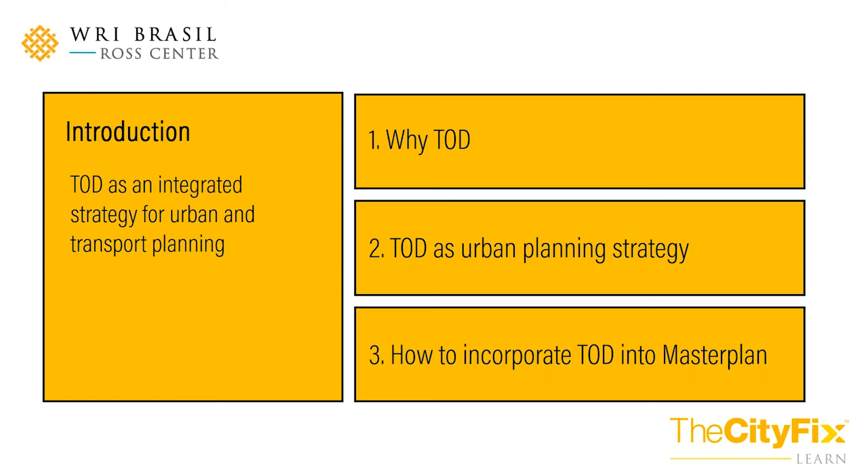As Luisa just said, we will talk about how to incorporate TOD in master plans, and almost the entire content of the presentation that we will have today is presented in a publication recently launched by WRI Brasil, which is called TOD in Master Plans. It is available for download only in Portuguese on our website, but since I see that there's a lot of Spanish speakers in the audience, maybe it could be very useful for you to access and download the publication.

But the entire content will be presented now in English, and you can have a sense of what we have in this guide. It's a guide focused on technical staff from municipalities, and is very objective on presenting specific actions to incorporate the TOD strategy in urban planning. So I hope you find this useful for your context and your cities also.

Before I start talking about how to incorporate TOD into master plans, we need to start talking about why we talk about TOD and why TOD should be something useful for cities. And the entire background of this discussion of why TOD is the urban form, or the urban patterns and models that cities present when they are developed.

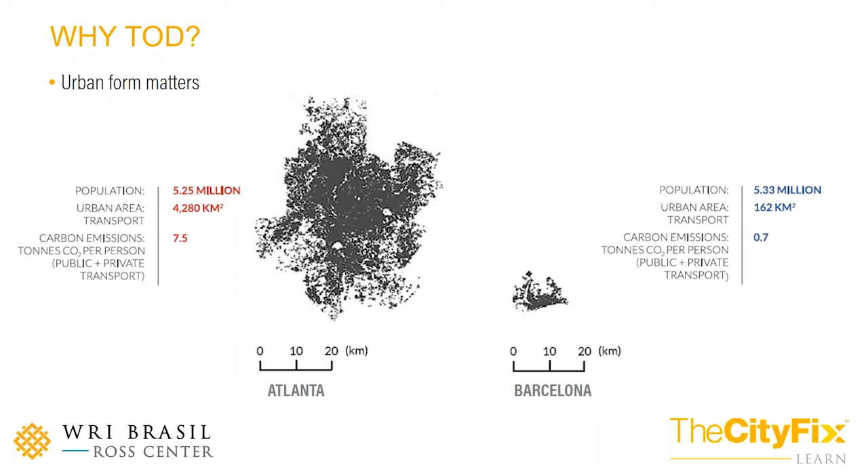So most important is to understand that this form of the cities matters, and matters in terms of efficiency, matters in terms of accessibility, the accessibility to opportunities, to jobs, to houses, to leisure, to education. So the different forms that cities present will have different performance in terms of these indicators. So this is a very well-known comparison of two cities, Atlanta and Barcelona, that have the same populations and very different urban forms that impact their efficiency and their performance.

So here in WRI, we approach these different models and this comparison using a very simple and easy to understand model, the comparison of 3D cities and 3C cities. So the model of a 3D city is the distant, dispersed and disconnected cities that are monocentric and will present inefficiency, will have a lot of congestion and impacts that reduce the productivity in terms of the economy of the city. So this is the most common pattern of cities in Brazil and many Latin American cities, and in the developing countries in the world.

And what we advocate is to start to act towards changing this urban pattern of 3D cities to what we call the 3C cities model. The cities that are compact, connected, and coordinated, and that present more efficiency, feasible public transportation systems, and thus higher productivity. And we think that TOD is a strategy to help move and change these patterns of urban development. So the background is we talk about TOD as a way to change the model that cities are developing in the world, in our case in Brazil.

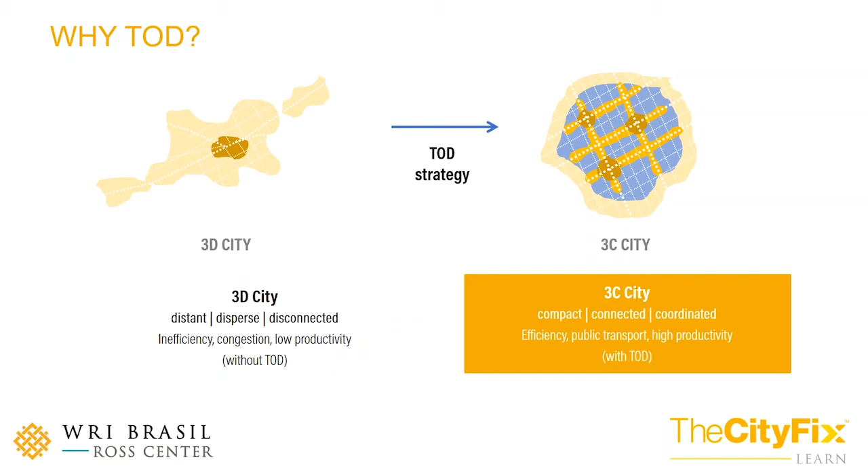So what is TOD? It's an acronym for Transit Oriented Development. And the explanation of it, in a very simple way, is the integration of land use and public transportation. So the entire understanding of TOD is to connect land use planning and public transport infrastructure and prioritize investments in development in these portions of the territory of the city where we have public transport infrastructure and provide adequate land use for these areas. But the broader definition would say that TOD promotes compact urban areas and promotes social interaction, and will impact the walkability and the accessibility to jobs, opportunities, leisure, etc., as I said before.

So in a nutshell, TOD is about integration, land use, and transportation. It's a strategy to achieve the 3C city model, should be implemented by the public sector, integrated with the private sector, and should be connected to different and sectorial urban agendas in the cities.

So TOD is one of the strategies that can be used in cities, but it's not the single one. We can have different strategies for the development of the city, and the TOD will be applied in any specific portion of the city where there is transport infrastructure. So it's not the single solution for the cities.

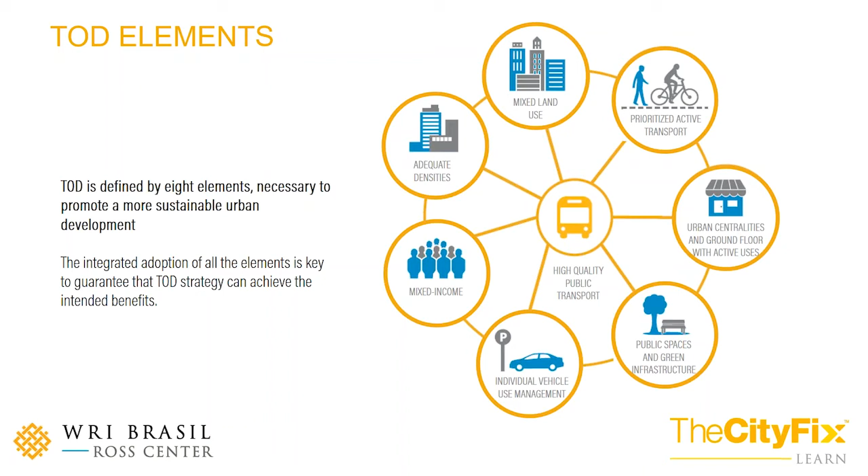So having a bus line crossing the area doesn't mean that this is a TOD project. So it's a very good example of good urbanism. You have some good elements, a lot of things to improve also, but you have some of the elements of TOD, but this is not TOD.

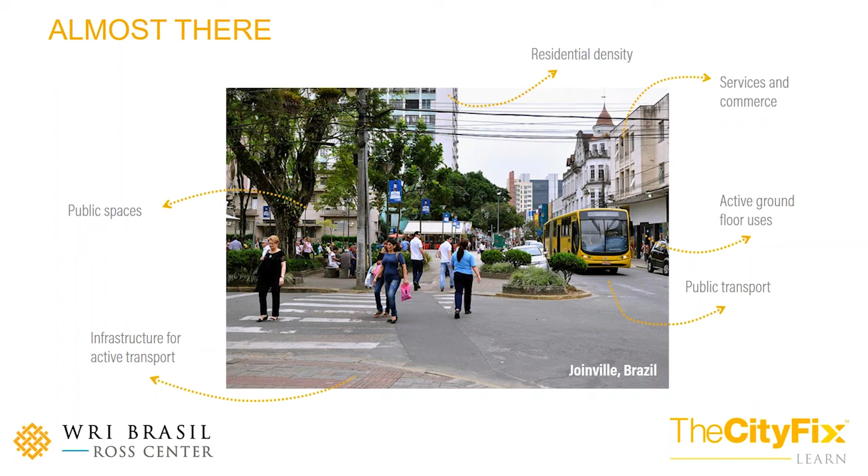But here is a very good example to see how the transportation infrastructure is the part that defines and determines the land use planning of the city.

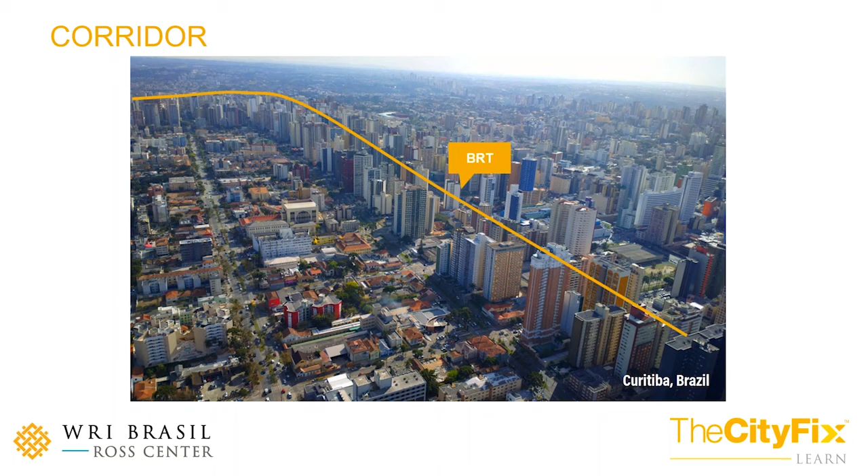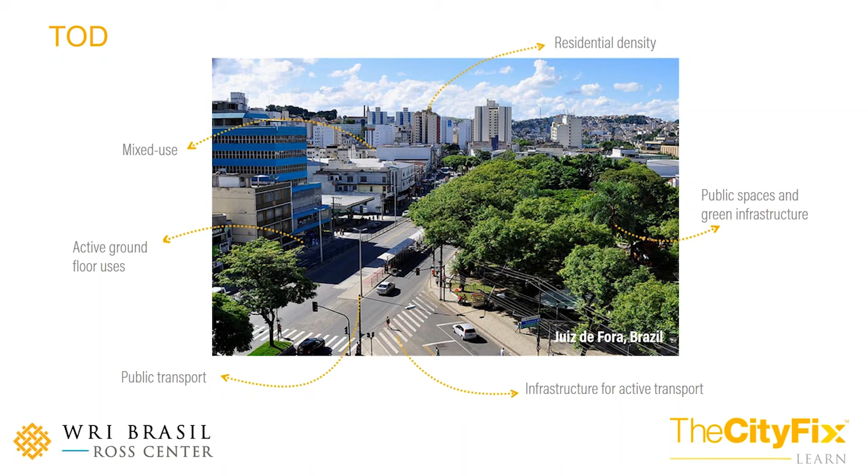And just to finish the definition of TOD, I'd like to talk a bit about what is not TOD. So don't consider TOD the promotion of density around public transportation, and don't consider TOD a single strategy for financing urban infrastructure. And this is very common when you connect land value capture to TOD and talk as if these things are the same things, and they aren't.

And it's not the commercial exploitation of a transport hub area. Another very common thing is to say, let's use a bus station as a shopping mall, and this is TOD. So no, this is not TOD if you do it separately. But all of these things that I just said, the promotion of density, a strategy for financing, and the commercial exploitation of a transport hub area can be TOD if they are implemented together and if they use the other elements that I just explained to you.

Okay, now that we understand a bit more our approach here in WRI Brasil to TOD and what it is, how can we turn this strategy into a reality? So how can we start to do this, going from the theoretical way to implementation? And then I want to share my personal experience when I started working here in WRI Brasil on TOD projects, not on planning, but in project implementation.

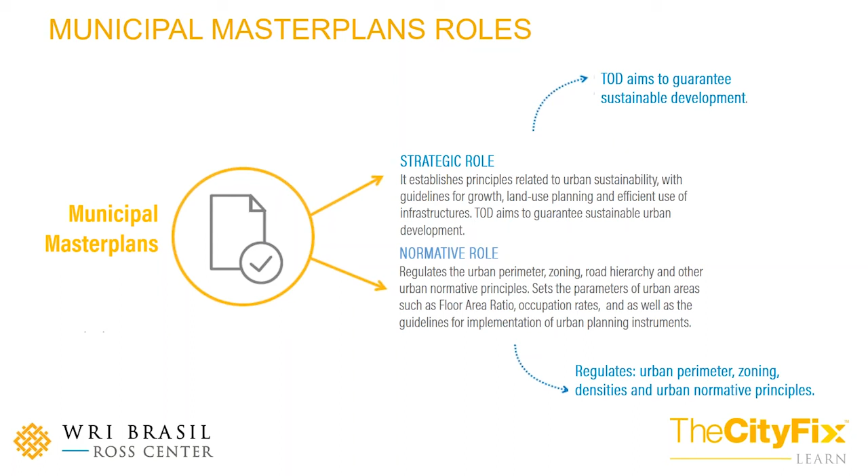Then, how can we incorporate TOD in master plans? How can we use master plans as effective tools to implement TOD? To do so, we think about some steps. First, the strategic role is where the master plan defines the TOD corridor. So you will look at the city scale, at the entire city, to define some strategies, and one of these strategies will be TOD and the corridors. Then you go a little bit down in scale and see what kind of TOD guidelines you can have for the transport corridors, and then you start to work on the normative, on the codes.

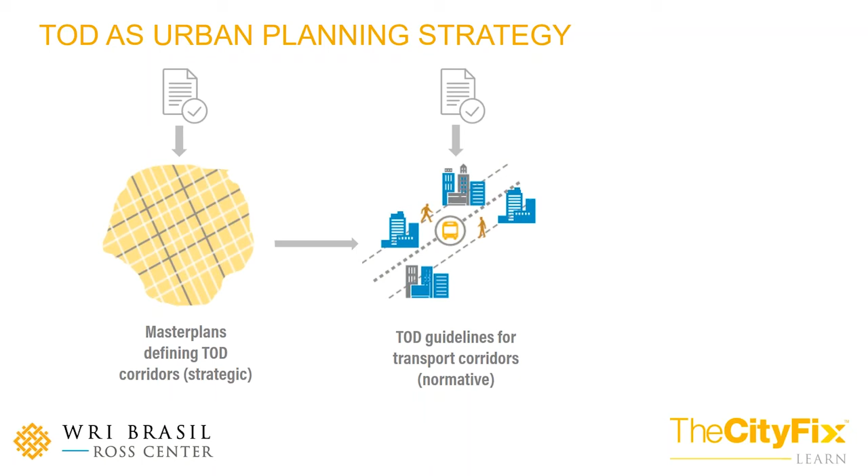And this is to have another model of city, the 3C city. So these two steps are the strategic and the normative. We have specific actions for each one of them, and I will present each one to you. First, we have 3 territorial principles for urban development, compact, connected, and coordinated, and you will see them when you think about the city scale. And then we have 8 actions for corridors or stations at the corridor level.

So starting with the first principle, compact urban growth. This is something where you need to look at the entire city, and it talks about controlling urban sprawl and guaranteeing smart growth. So this is when you have to look at the perimeter, the definition of the perimeter of the city, and the planning of expansion areas for the city. So here we are saying in the publication how you can plan for smart growth, how you can control the expansion of the city, promote the occupation of urban voids, control urban sprawl, etc.

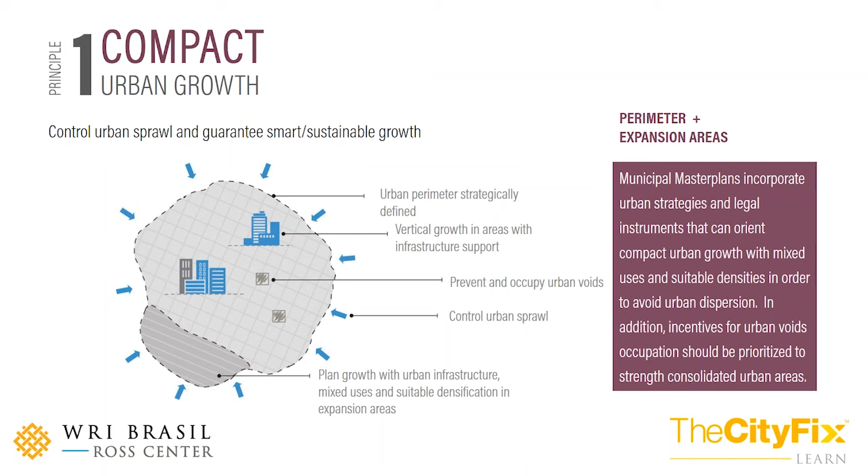The second principle is the connected infrastructure, and this is where TOD happens, when you connect your territorial strategy to the presence of infrastructure. So here's where you define the TOD corridors and you do the zoning and you define different land uses based on the capacity of support of the infrastructure or the future capacity of support for the infrastructure. So here you will use the zoning as the main tool and optimize the use of infrastructure in the city. So this is principle 2, connected infrastructure.

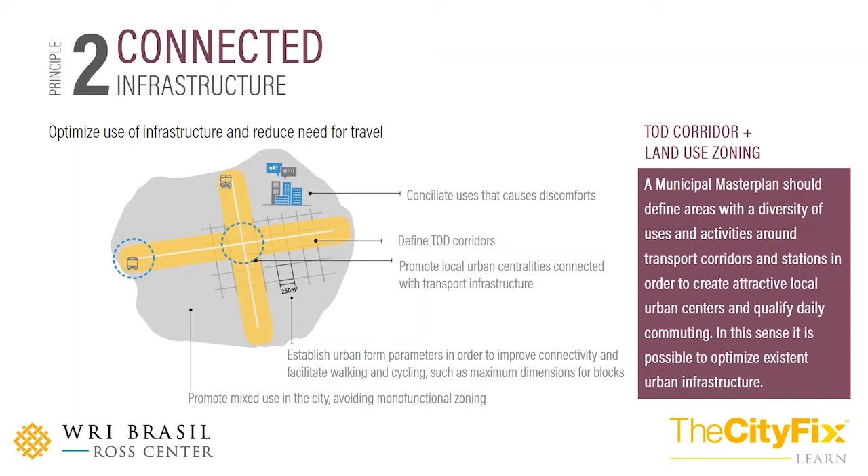And then we have the coordinated management. And here we decided to be very specific about the land market and the land values management. So the third principle, the coordination, is based on the management of the land values in order to be able to use land value capture mechanisms as a financing strategy of the city. And the master plan is key. It's a key step to unlock the land value capture mechanism.

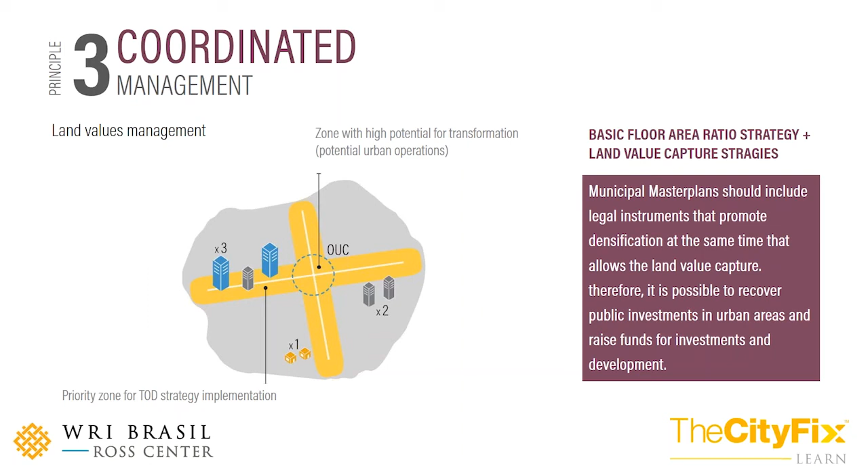So what we say here is that the master plans need to include legal instruments that promote densification at the same time that allow for land value capture, making it possible to invest in the city. And I will try to explain very quickly something that we advocate here in Brazil to include in the master plans as a very important step to implement land value capture and therefore TOD in the future, to invest in TOD. So this is the differentiation of basic floor area ratio, the basic FAR, and the variation of maximum FAR

along the urban territory. So you need to include this differentiation of basic and maximum FARs, and then you can define a land value capture instrument that will charge for the additional FAR that someone needs to buy in order to build a bit more. And then you use this money to distribute investments in the territory and make other parts of the city capable of receiving more densification. But the main idea here is to differentiate the basic floor area ratio from the maximum, and I can explain this a bit further during the questions and answers.

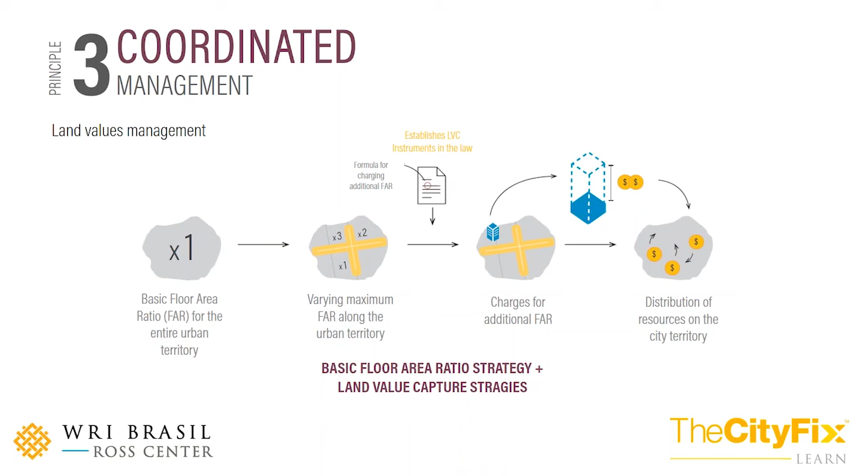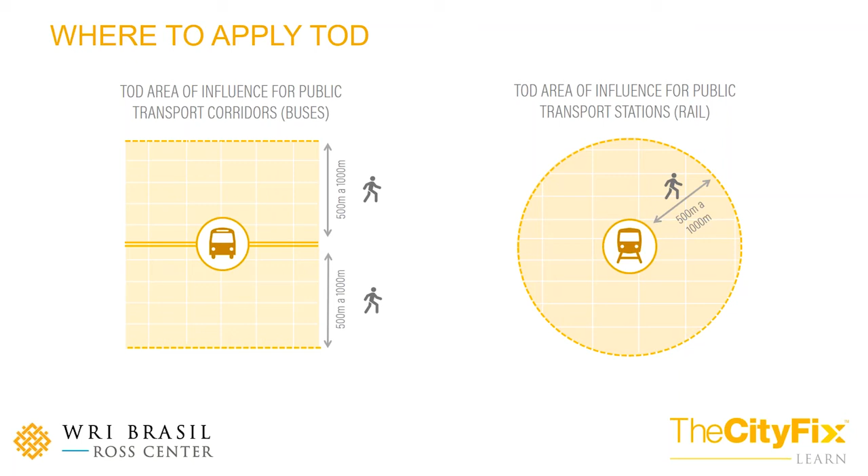Well, these were the three principles, and then we can go deep and talk about the corridor level and the 8 actions to implement TOD at the corridor level. But first, we need to define what extent we have for the corridor level. So we just define here very briefly that something between 500 meters and 1,000 meters should be an ideal distance from the transportation infrastructure to implement these strategies at the corridor level. And then we have these 8 actions at the TOD corridor level, once you have defined by the principles some TOD corridors to apply this strategy.

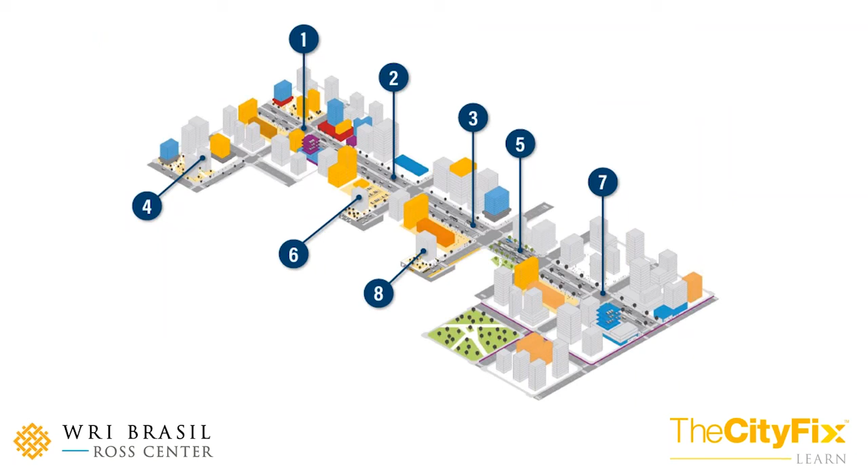And the 8 actions that we present intend, by the codes in the master plans, to define ways to implement the design elements from TOD. So each action will be related to some of the TOD elements that we presented before. So the first action is to intensify densification and land use around public transport corridors and stations. This is about densities and mixed land use, and the core of the TOD strategy is to intensify the land use where there's infrastructure for public transport.

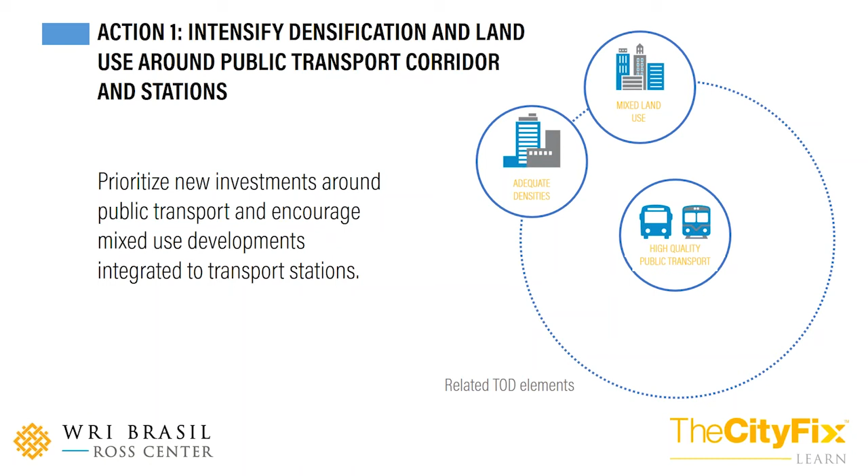And how should the master plans do this? They should give priority to new developments, to projects in the areas where the public transportation infrastructure is. So we can promote more densification. You probably need to have higher FARs in these areas, and you can apply some instruments to encourage mixed uses, also different housing patterns in these areas. And then in the publication, we present very specific instruments from the Brazilian law, from the City Statute, that you can use to promote it. Here we are doing an adaptation and making it more generic to relate to the general context of different cities in the world.

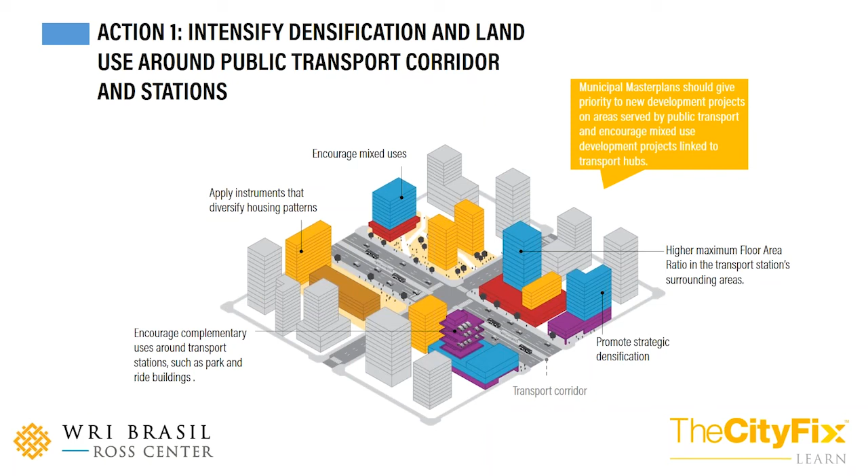The second action is to discourage underutilized land in areas served by high quality public transport. So this is related to mixed income and again the densities. It's about promoting the development of vacant areas, and you can do it using property taxes, compulsory construction, and it's very important to articulate this fostering of the use of vacant land with housing strategies. So the master plans can propose instruments to stimulate or compel the implementation of new development in these areas, and they can avoid real estate speculation in these areas and can articulate housing investments with these areas.

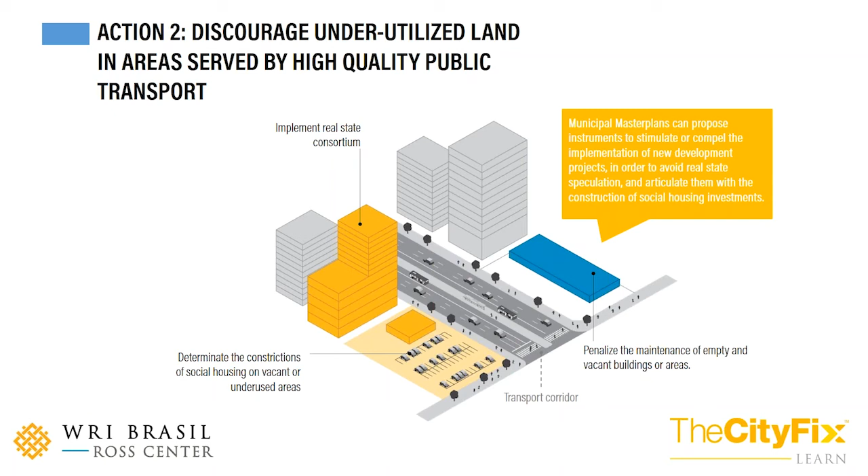Sometimes penalizing the maintenance of empty buildings or determining compulsory use of some vacant areas. In other moments, you can do some real estate consortiums or other arrangements to foster the use of these underutilized areas.

The third action is about the mixed income. It's to diversify housing patterns. So it's to promote housing which is mixed land use, and with different patterns, which is mixed income. And the master plans should do this, defining areas for social housing.

In Brazil, we have a very specific instrument where you determine a social housing special interest area. And you need to, in the master plans, intensify the use of these kinds of instruments closer to the public transportation. We can also promote the implementation of a ratio for social housing in greater investments or in greater developments.

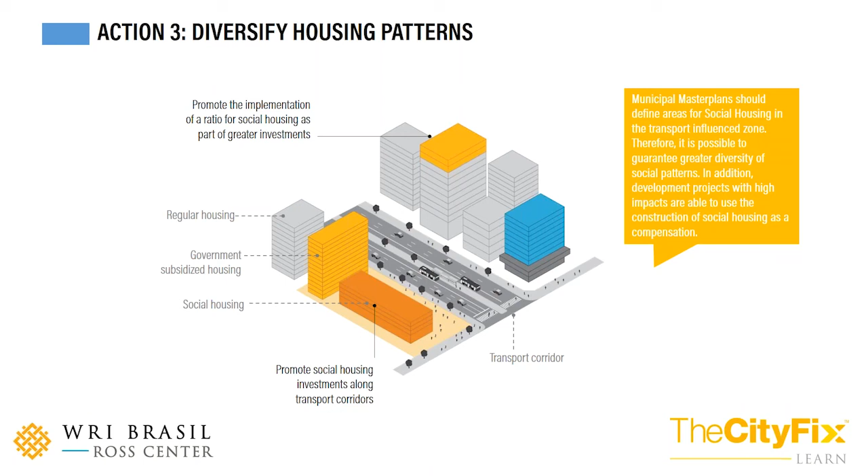The fourth action is the integration of private and public spaces in favor of pedestrians. So this is about incentivizing new buildings, incentivize that they have active uses on the ground floor. You can promote more semi-public areas and larger sidewalks by including incentives in the master plans.

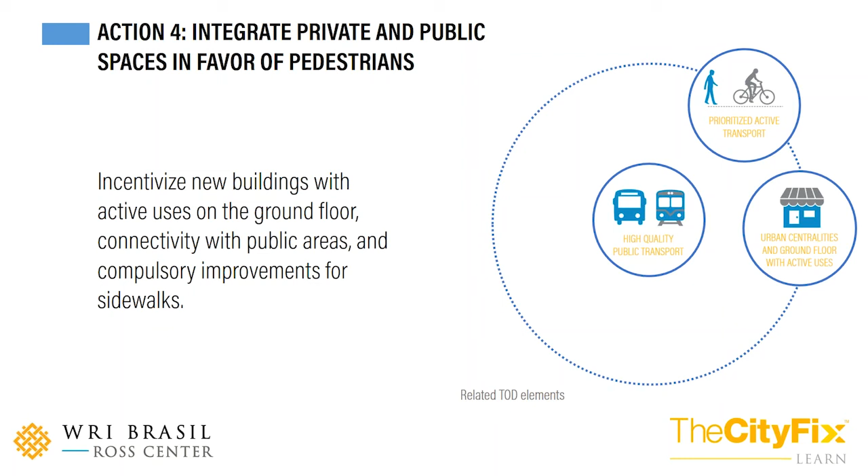So you can promote incentives to the buildings to have active uses in the ground floor. Maybe you can do incentives based on the FAR. For instance, you can give more FAR if the project has active uses in the ground floor.

We can use other transfer of building rights instruments to have more space for sidewalks or for semi-public areas. So you can use the master plans to promote this integration between private and public spaces, making the built environment more friendly for the pedestrians.

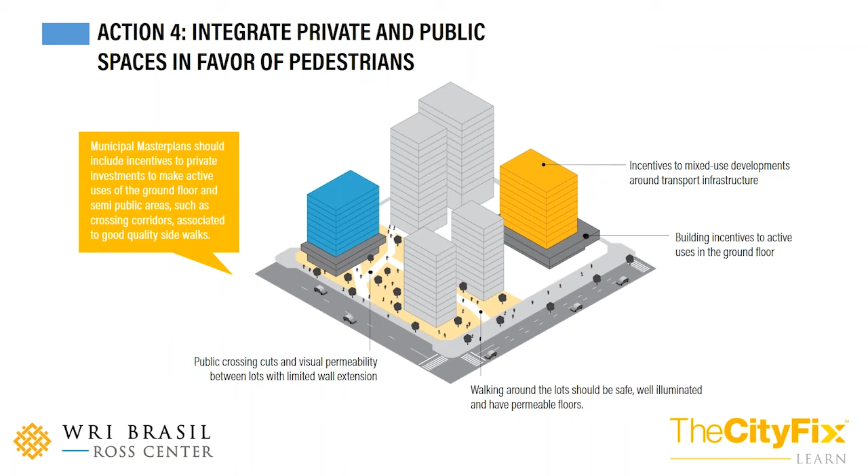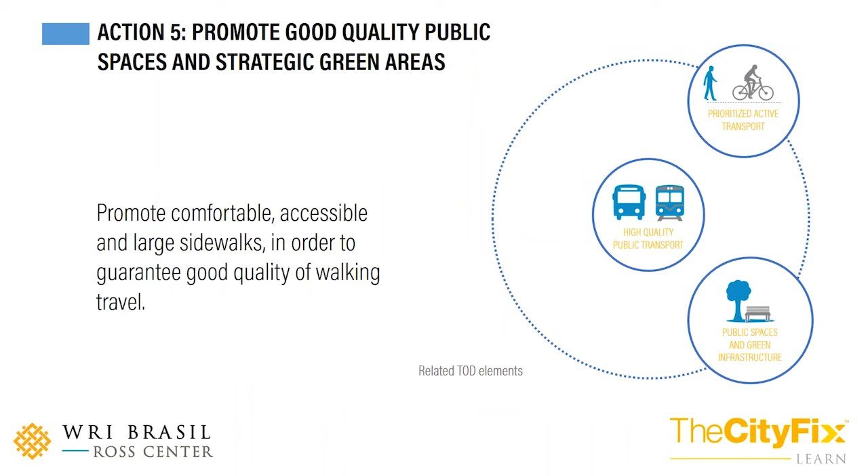The fifth action is to promote good quality public spaces and strategic green areas. It's very related to the other one when you prioritize the active modes of transportation, but mainly connected to public spaces and green infrastructure.

So what master plans can do about it is to reserve land along the transport corridor to provide infrastructure to pedestrians, and this means sidewalks, but also reserving land for new public spaces, for parks and other green areas, and it can be connected to other sectorial agendas like urban vegetation and urban trees in the city.

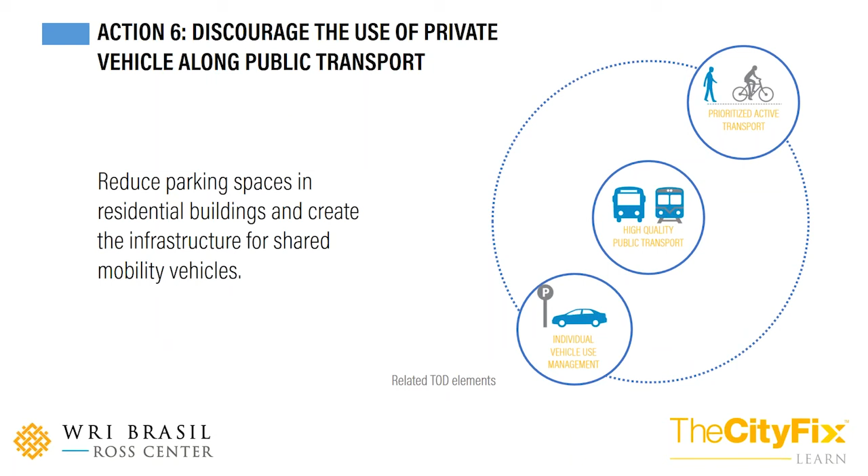The sixth action is to discourage the use of private vehicles along public transportation. It's something that I said before, that it's very important to do vehicle use management inside the TOD corridors and discourage the use. And mainly what master plans can do about it is to determine a maximum number of parking spots by number of residences in the area of influence of the corridor.

So you can do a very effective management of the parking spots by the urban codes defined in the master plans.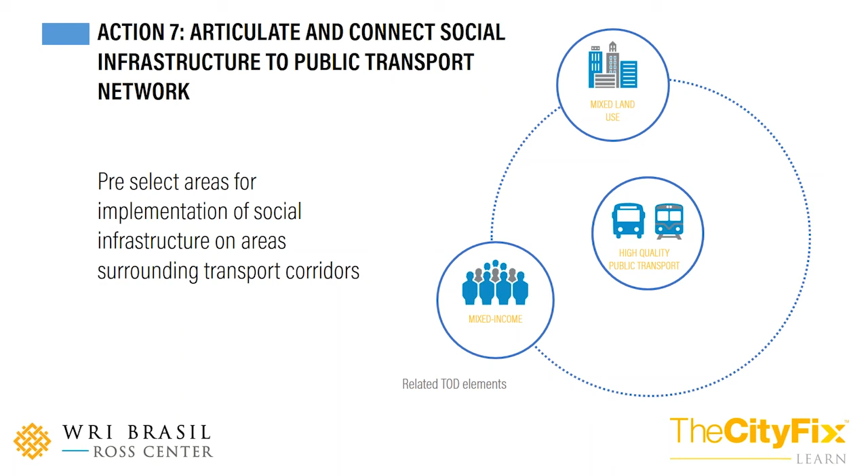You can, again, reserve specific lands for investments in schools or hospitals or social assistance, and you can connect these directly to the transportation infrastructure, and you can promote new and better public spaces, also making an urban planning that combines these different kinds of public facilities closer to the transportation infrastructure, which will be more accessible to everyone once you have high quality public transport that connects different parts of the city to this corridor.

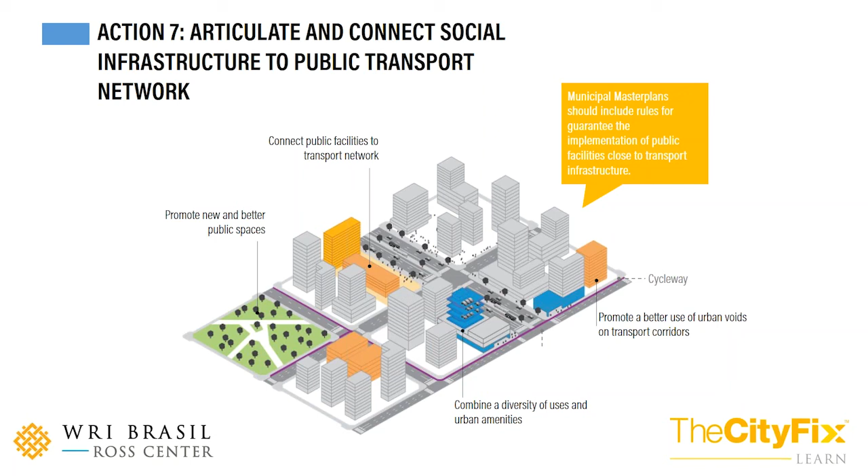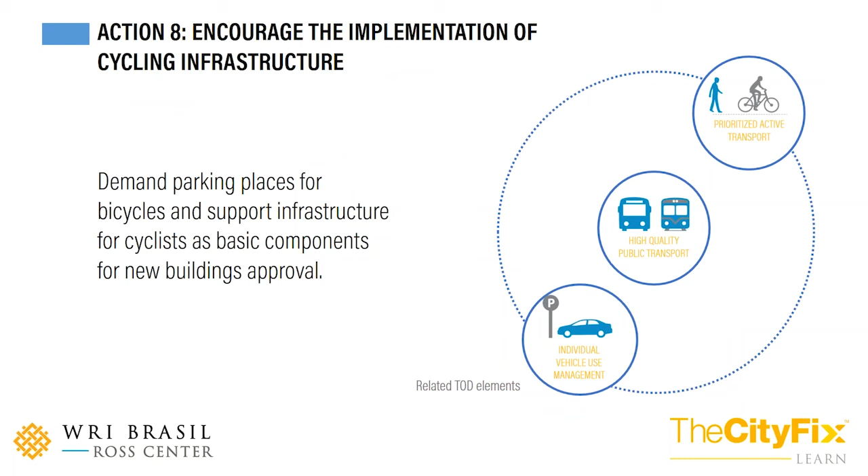And the last one, the 8th action, is about encouraging the implementation of cycling infrastructure. So how you can promote more active transportation, mainly cycling infrastructure, and manage and discourage the use of individual vehicles. So again, you can work mainly on the parking management that relates to master plans.

So master plans can request parking and support areas for cyclists as basic components to approve new buildings. So you can request changing rooms or minimum parking places for bikes as conditions for the approval of new buildings.

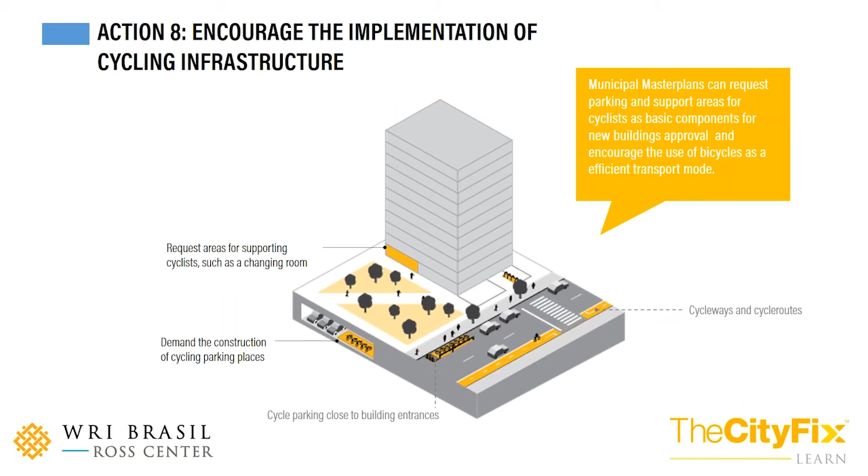So these were the 8 actions and the entire framework of 3 territorial principles for urban development and 8 actions for the corridor. These, I believe, are very effective ways to incorporate the TOD strategy in the master plans in a way that will be implemented along the years after the definition of the master plan.

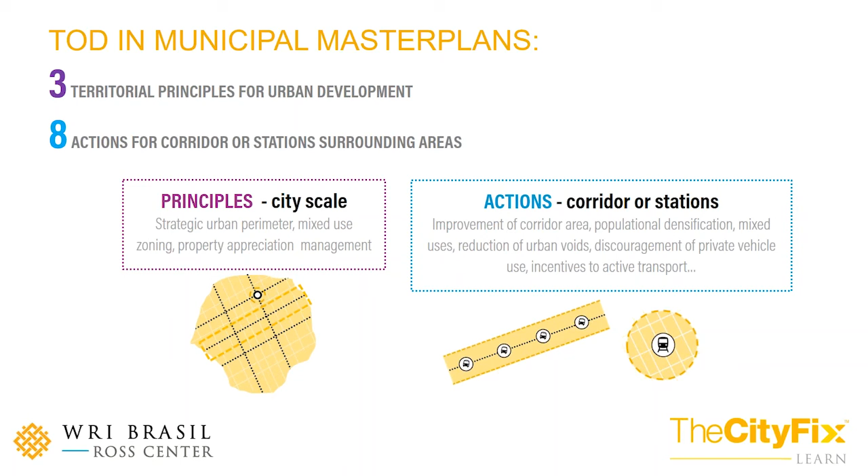So just to summarize what we talked about since the beginning of this presentation, we started talking about the entire idea of sustainability, economical, social, and environmental, and this means a more sustainable model of city and a model of urban development, the 3C city. And to achieve it, we talk about TOD as a strategy in urban planning to change this current pattern of cities. And we saw that to implement TOD, we can't talk only about projects on design, governance, and finance, but that legislation is really crucial to its implementation.

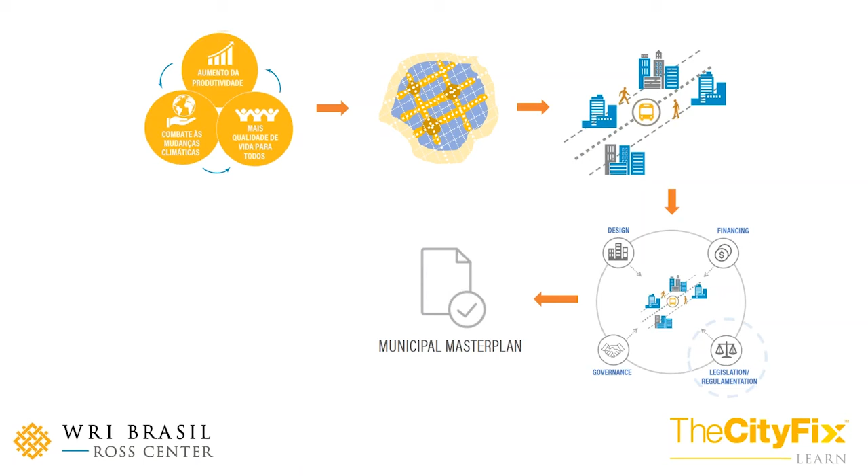And then you have a very important role of the municipal master plans as the main tool to change the urban codes and legislation for implementation of TOD. And then we have our assessment on actions and principles and how to incorporate them into municipal master plans.